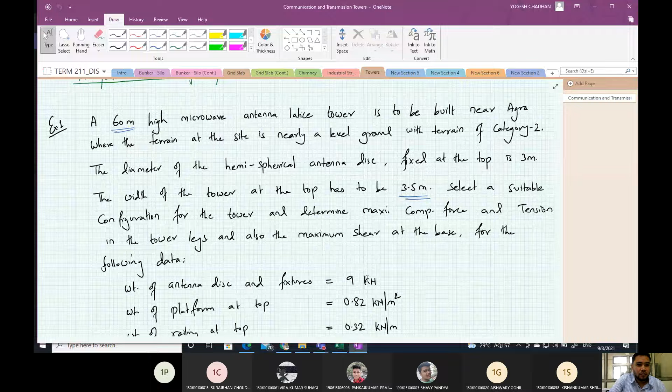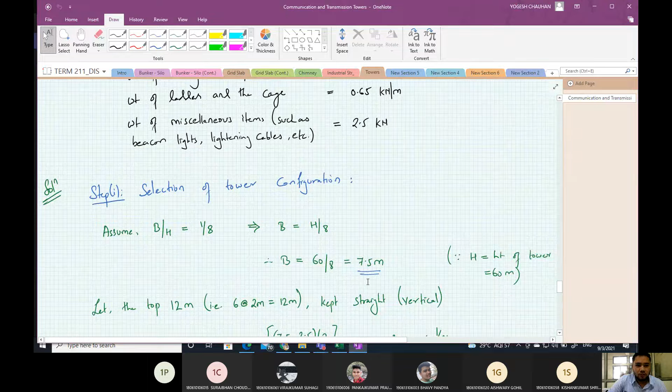Okay, so in the previous class, we started with an example of a microwave antenna tower. We were supposed to analyze and design a 60-meter high microwave antenna lattice tower. The first step was the selection of tower configuration, and we have reached the tower configuration shown here.

Now, today we'll find the loads acting on this tower. So the next step would be load calculations.

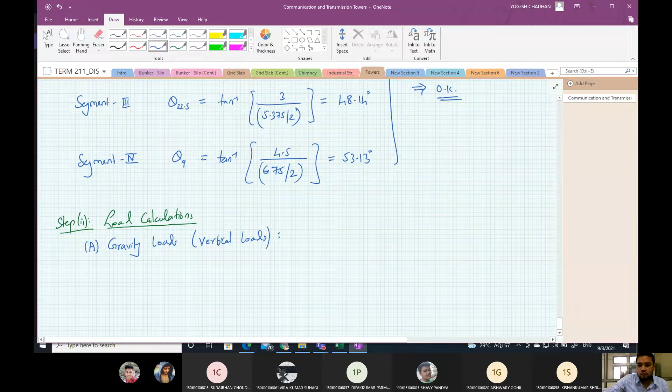First we'll find the gravity loads, that means vertical loads. In the theory class we have seen the gravity loads are due to the self weight of the member, the weight of the platform, railing, ladder, lifts, etc. provided, then weight of the antenna, instruments, appliances, etc., the weight of the gusset and secondary bracings, and the live load.

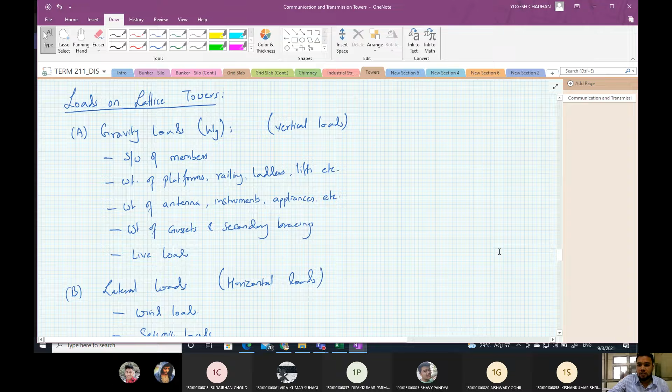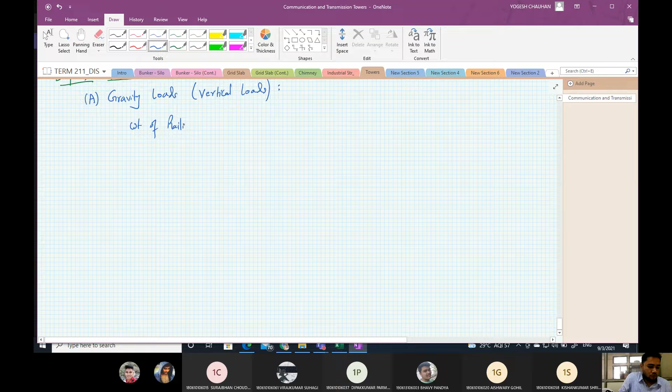So first is weight of railing, which is given in the data. The weight of the railing at the top is 0.3, not 0.32, it is 0.3.

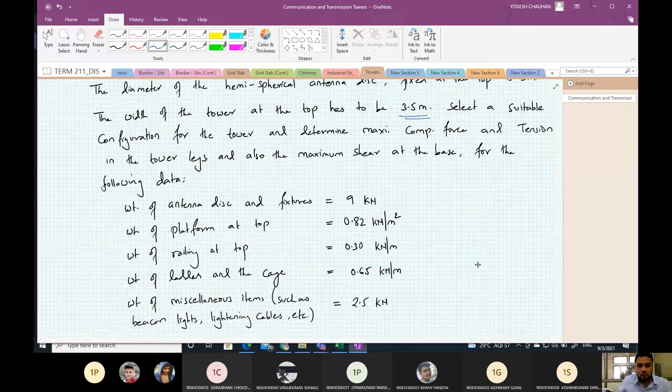Now it is in kilonewton per meter length. So multiply by 3.5 into 4. See, the railing is provided at the top, so at the top we have a 3.5 by 3.5 periphery, so it will be 4 times 3.5. So it is 0.3 into 3.5 by 4.

See, it is like this: 3.5 by 3.5, and the railing is provided, this is the railing. So this will be equal to 4.2 kilonewton.

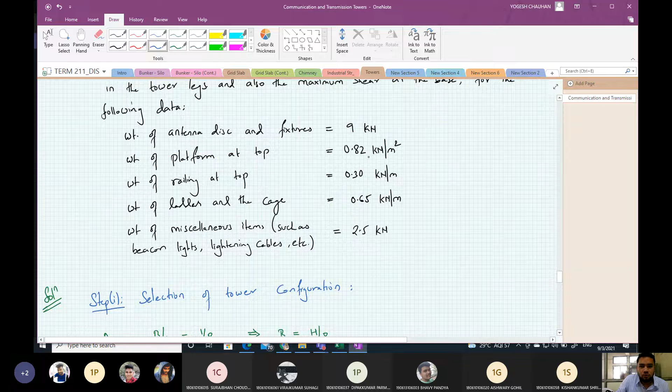At 0.82 kilonewton per square meter, which is given in the data, that will be equal to 0.82 multiplied by 3.5 by 3.5. This is the platform area. So the weight of the platform per square meter has been given to us, so multiplied with the floor area.

That will be equal to 10.05 kilonewton. Okay, here you can add the weight of the railing is at 0.3 kilonewton per meter.

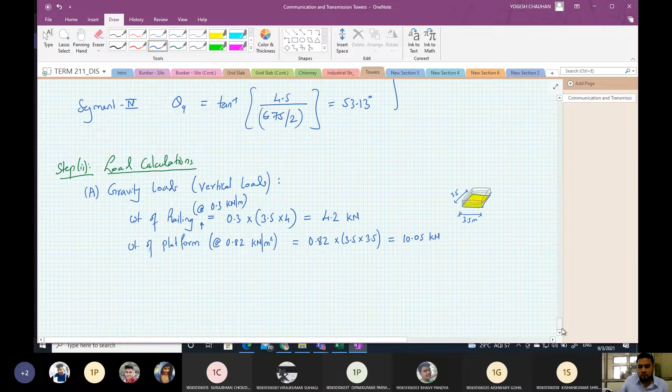Then the live load on the platform, which is 0.75 kilonewton per square meter. That you can obtain from IS 875 Part 2. For flat roof, it is 0.75. So that will be equal to 0.75 into 3.5 by 3.5, which gives you 9.19 kilonewton.

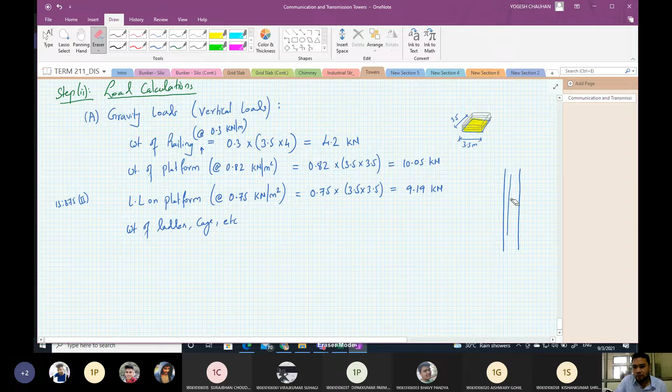Then we have weight of ladder, cage, etc. Now to climb the tower, ladder is provided, and the cage for the ladder is also provided. We have a ladder here, and there is a cage.

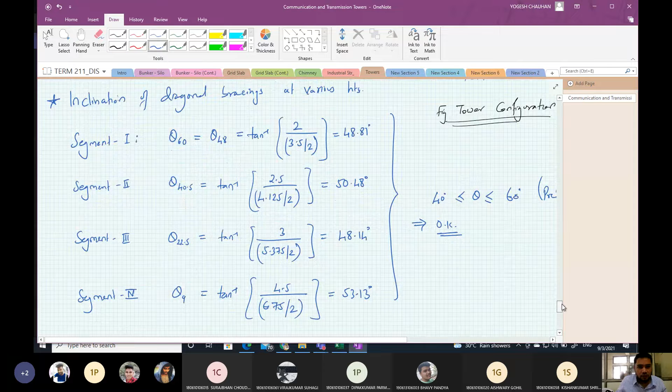So the weight of the ladder and cage, again given in the data, is 0.65 kilonewton per meter height. So 0.65 into total height, which is 60 meter, gives you 39 kilonewton.

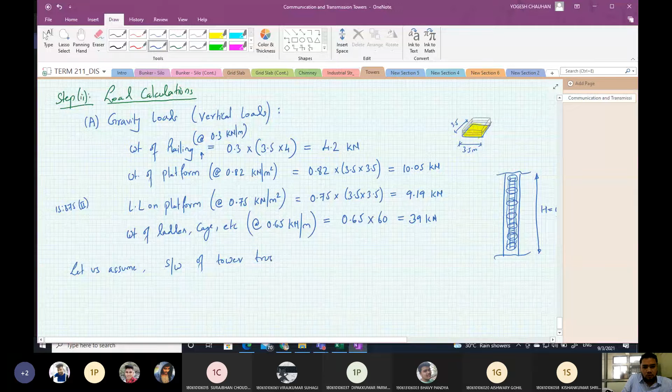Then let us assume self weight of tower truss, that is at the rate of 4.5 kilonewton per meter. This is also per meter height. So it will be 4.5 into 60, that will be equal to 270 kilonewton.

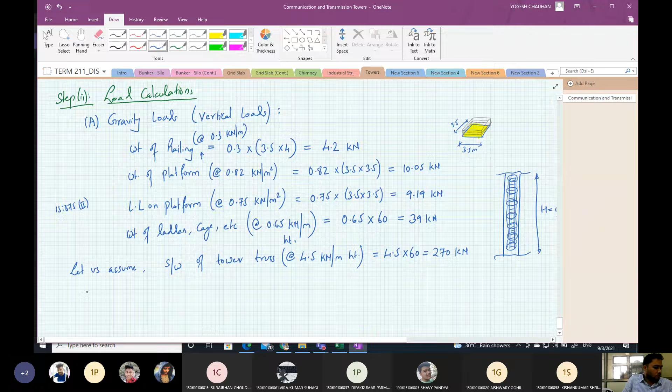Then we also have the weight of miscellaneous items, which is given in the data as 2.5 kilonewton, and the miscellaneous items include beacon, lights, lightning cables, etc.

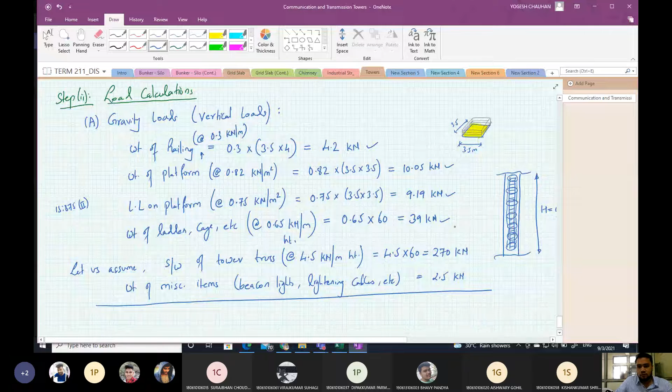So the total vertical load will be the sum of all this: 4.2 plus 10.05 plus 9.19, and so on, that will be 334.94 kilonewton.

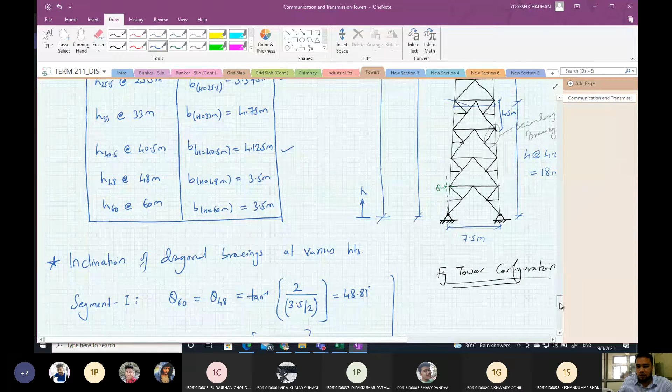So total weight on 4 legs will be 334.94. Now the weight on each leg will be equal to 334.94 divided by 4, which gives 83.735 kilonewton.

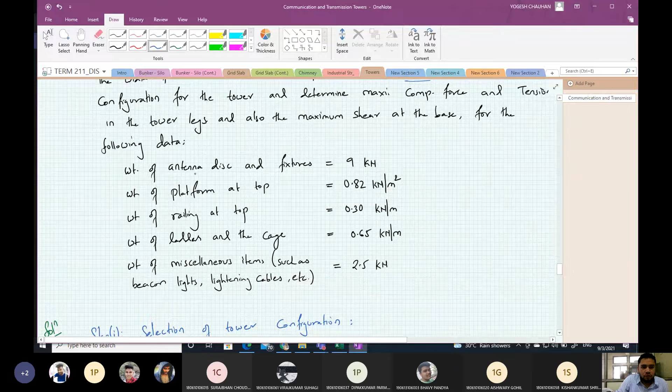Now in addition to this, we have the weight of the antenna disc and fixtures. This antenna and its fixtures will be connected on one side of the tower, so let us say it is connected here.

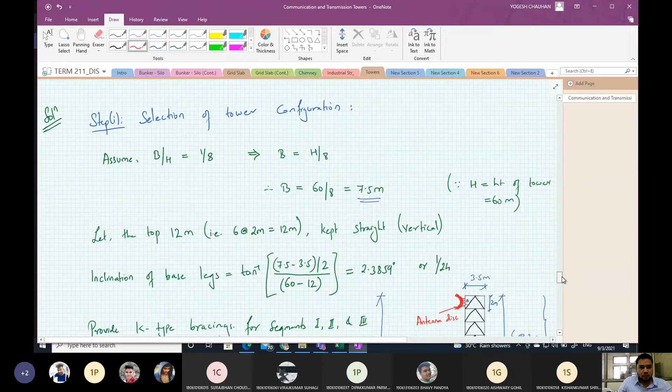This is the antenna disk, and its fixtures. The weight of this antenna and its fixtures is given in the data as 9 kilonewton, and this will be carried by the two legs, because the antenna is fixed here.

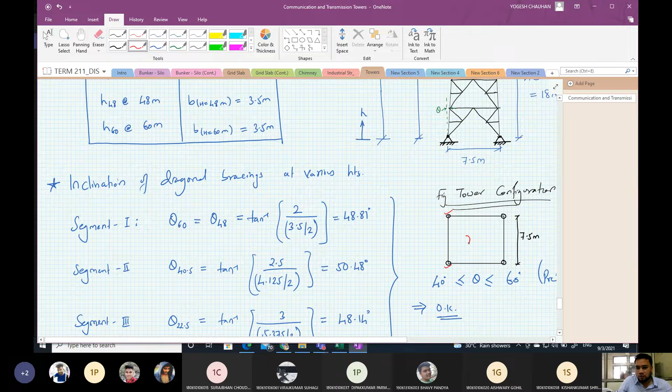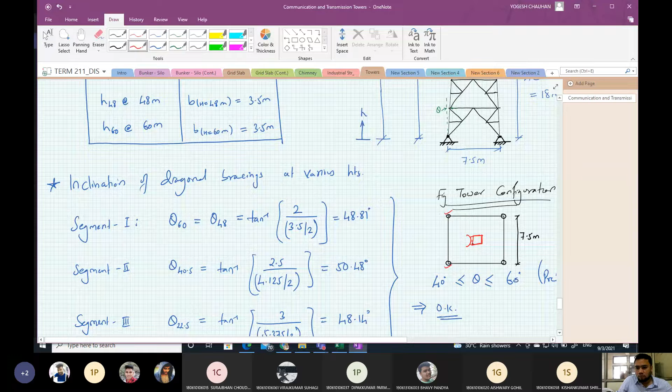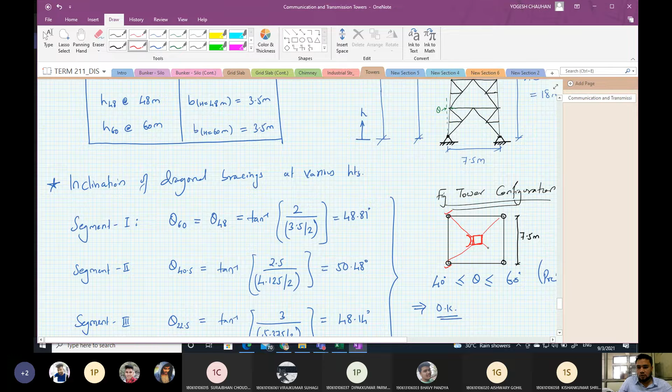So the weight of this will be taken by these two legs. Weight of antenna taken by two legs only. So it will be equal to 9 by 2, that is 4.5 kilonewton.

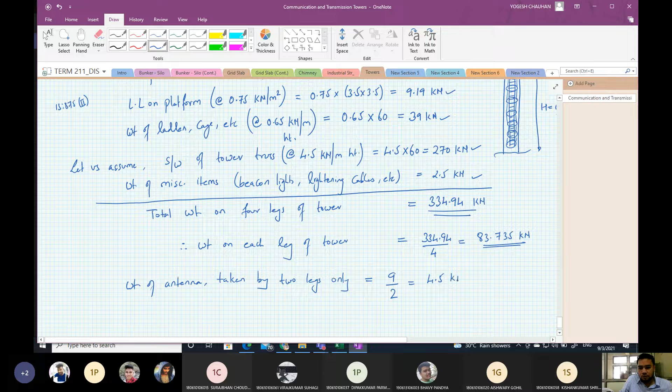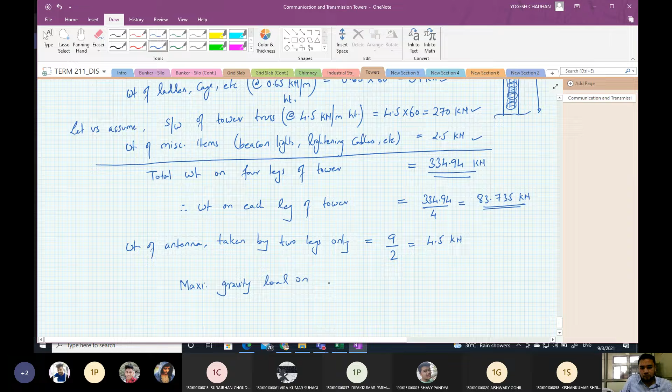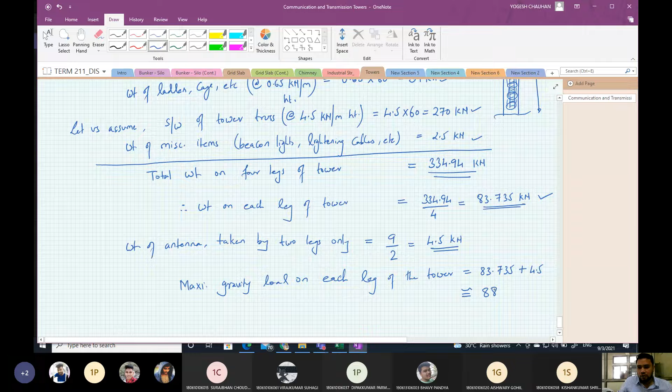So the gravity load, we can say the maximum gravity load on each leg of the tower will be equal to 83.735, that is this value plus this value, plus 4.5, that will be equal to approximately around 88 kilonewton. So we have the total gravity load.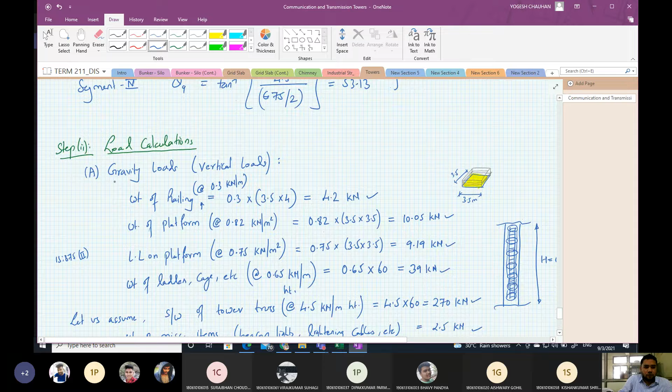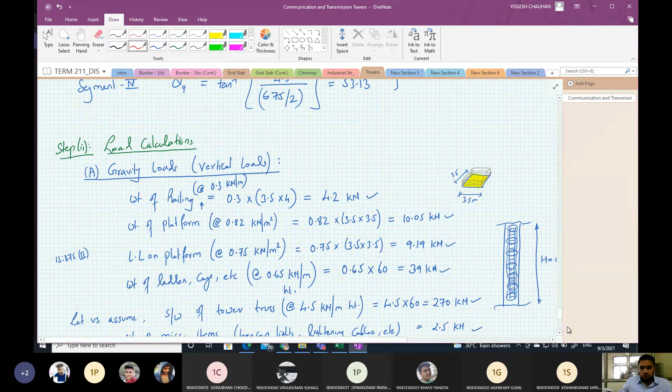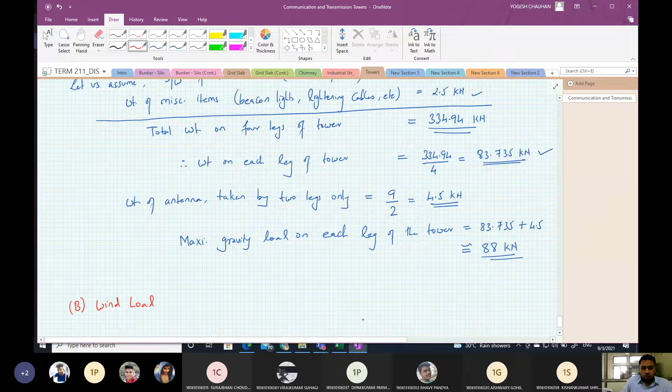Next we'll find the wind load. Here we'll be using IS 875 part 3, and we'll solve this example using the old code, and after that I will also show you what changes are there in the new code. So let us first find the wind load using the old code, and then later on show the changes for the new code.

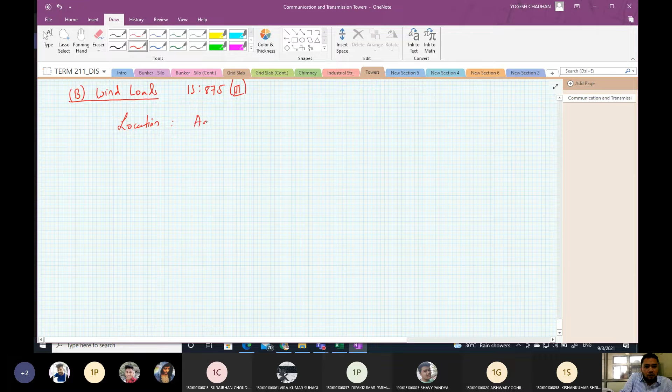So here our location is Agra. For Agra, the basic wind speed is 47 meter per second. Then we have been given the terrain as plain terrain with level ground and terrain category 2. So terrain data is given to us as level ground with terrain of category 2.

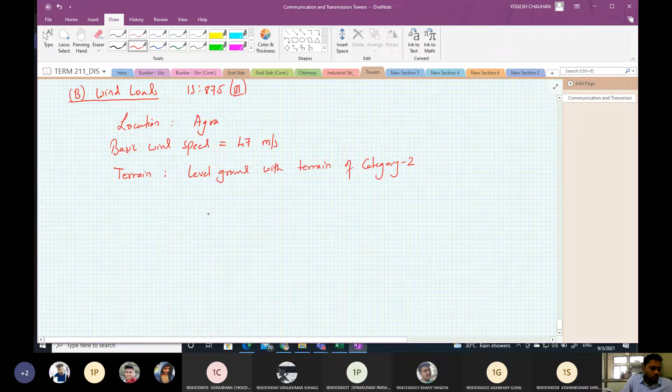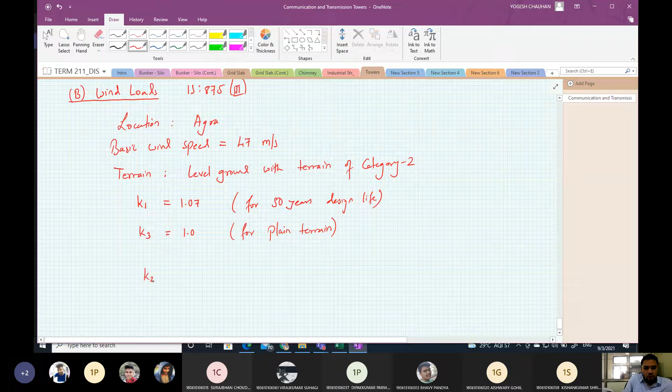Now K1 factor will be 1.07 for, let us say, 50 years of design life, and K3 factor is 1 for plain terrain. Now K2 will vary with height, so let us make a table of K2 for different heights, H and the value of K2.

We'll find the wind load at 18-meter height above the ground, 33-meter above the ground, 48-meter above the ground, and 60-meter above the ground. And the corresponding values of K2 are 0.99, 1.05, 1.09, and 1.11.

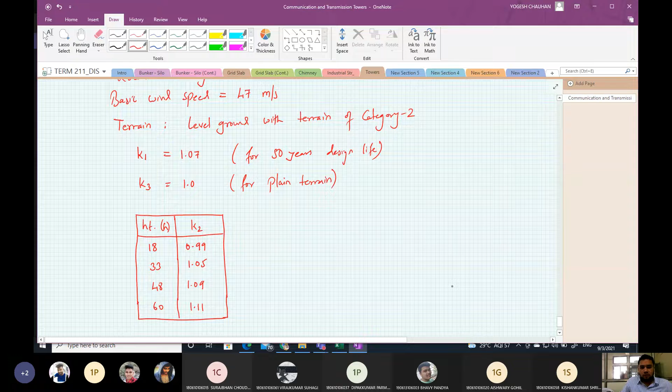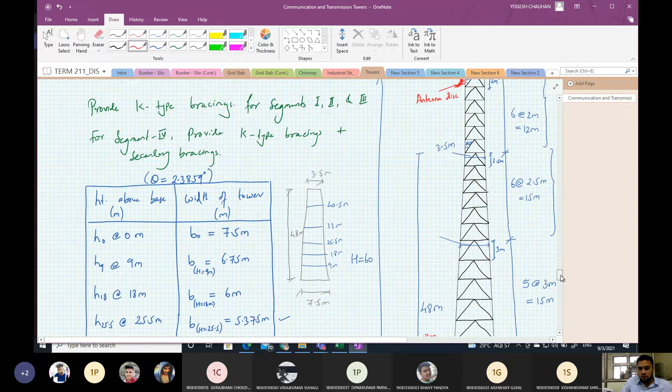So we'll find the wind load at these points. At this level is 18 meter. We'll find this at this level, that is 18 plus 15, that is 33 meter. We'll find at this level also, it will be 48, and at 60 meter.

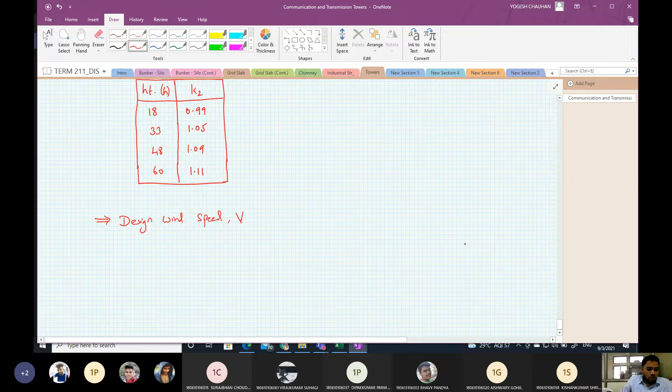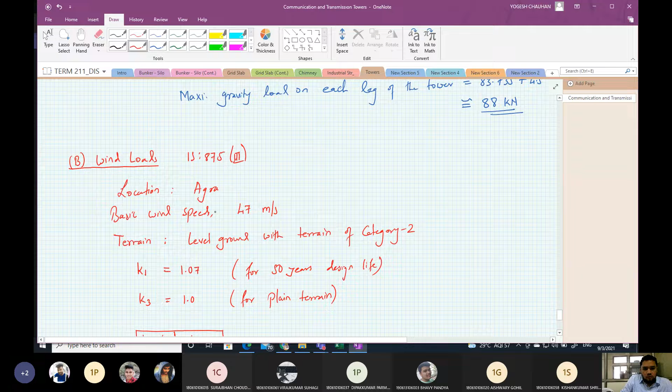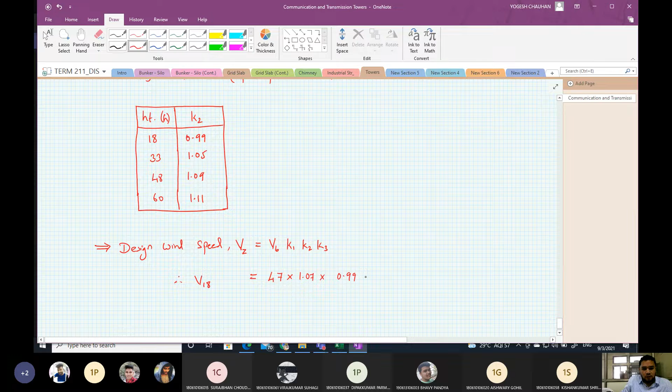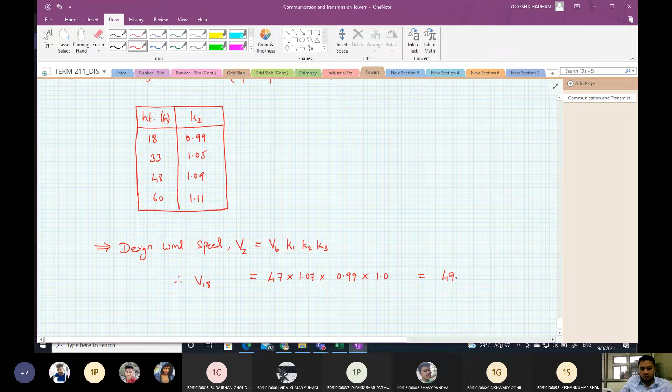So now let us find the design wind speed, Vz. We write this as Vz is equals to VB, K1, K2, K3. In the new code there will be a K4 factor also that we'll see later. So V18 means at Z is equal to 18 meter. At 18 meter height, VB is 47 into K1 is 1.07, K2 is 0.99 and K3 is 1. That gives V18 as 49.79 meter per second.

Similarly V33, V48 and V60. That will be equal to 47 into 1.07 into, K2 is 1.05 at 33 meter height, into 1.0, this will give you 52.80 meter per second. Or simply you can make a table here also for Vz, and write 49.79, 52.80, 54.82 and 55.82. So we can find it from K1, K2, K3, VB.

1.09 into 1.0, 1.07 into 1.09 into 1.0, gives 54.82 meter per second. 47 into 1.07 into 1.11 into 1.0, gives 55.82 meter per second.

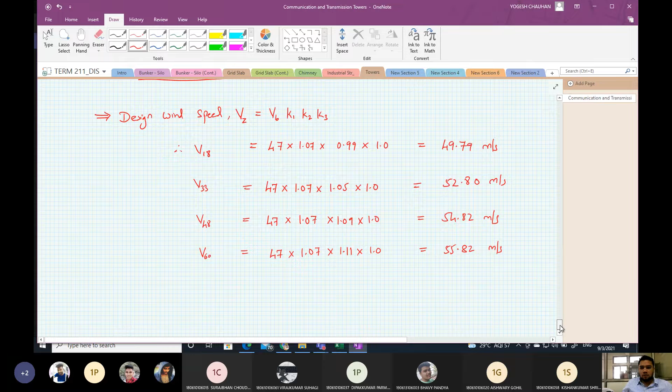So we have the design wind speed. Then we can find the wind pressure also. PD is equals to 0.6 Vz square. Design wind pressure PD or Pz, you can write Pz also. Pz is equals to 0.6 Vz square.

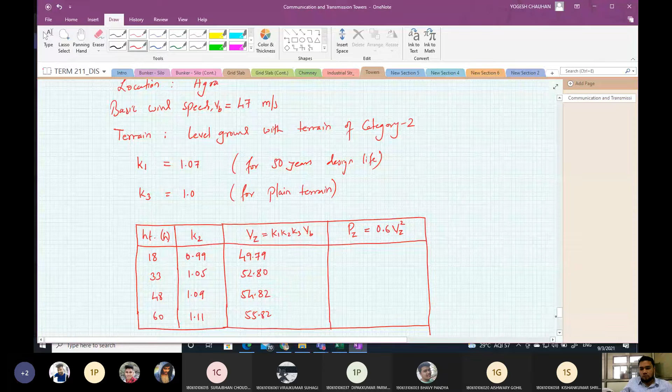So P18 will be equal to 0.6 into 49.79 square. Let us convert this into kilonewton per meter square, so multiply it with 10 to the power minus 3. That will give you 1.487 kilonewton per square meter. Then P33, P48 and P60 you can find in the same way.

P33 is 0.6 into 52.80 square into 10 to the power minus 3, that will be 1.673 kilonewton per square meter. You can make a table instead of calculating all this. ...square into 10 to the power minus 3, that will be 1.803.

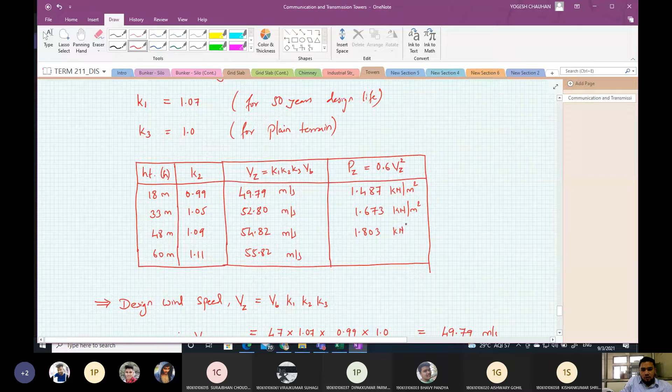You can also make an Excel sheet, because for transmission towers we are grouping the members and then designing, so you can make a spreadsheet which will be handy for such calculations. So the values are 1.487 kilonewton per meter square, and the wind speeds in meter per second at the respective heights in meters. Then 1.673 kilonewton per square meter, 1.803 kilonewton per square meter, and 1.870 kilonewton per square meter.

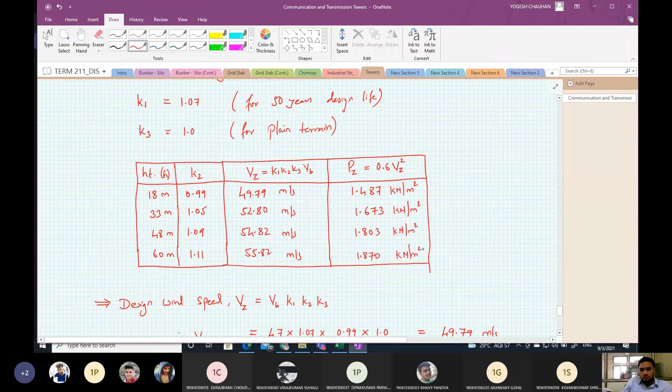So next we find the effective frontal area. Here in this case it will be the average frontal area.

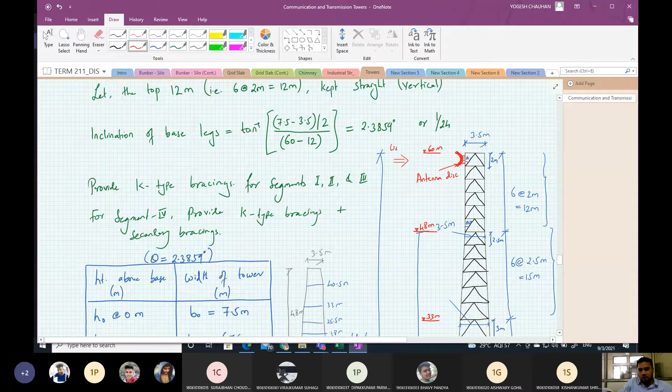We'll be using the gross area for various segments. For the first segment, the frontal area will be equal to height multiplied by the width of the tower, because wind will be acting from this direction. So it will be this height for the first segment - this is our first segment. The height of first segment is 12 meter by 3.5.

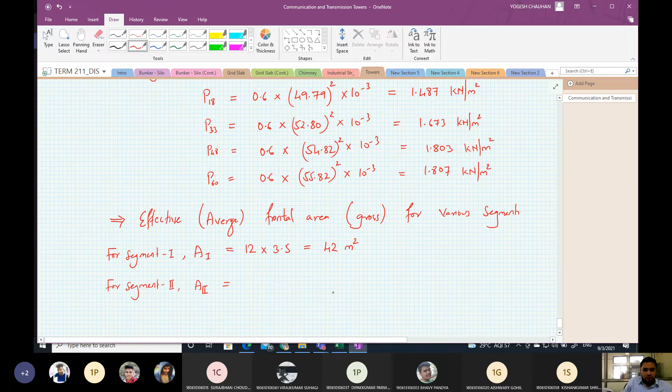So that will be 42 meter square. Then for segment 2, the effective frontal area will be equal to - now this time we have to take the average, because now the tower legs are inclined, so the width here is 3.5 and the width here is 4.75. At 33 meter height width is 4.75 and at 48 meter it is 3.5.

So you take the average width, and the height of segment 2 is 15 meter. For segment 2 the height is 15 meter, so it will be 15 multiplied by average width, that is 3.5 plus 4.75 by 2. So that will be equal to 61.875 meter square.

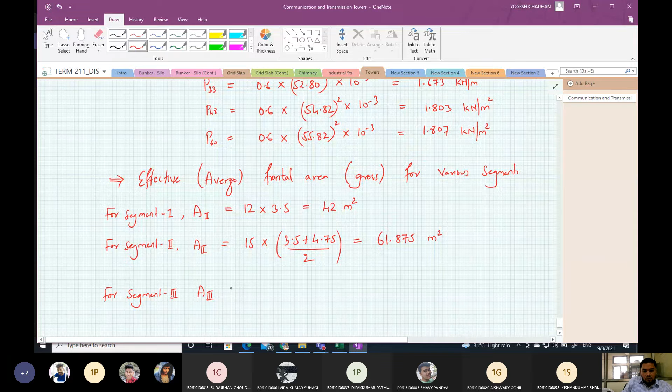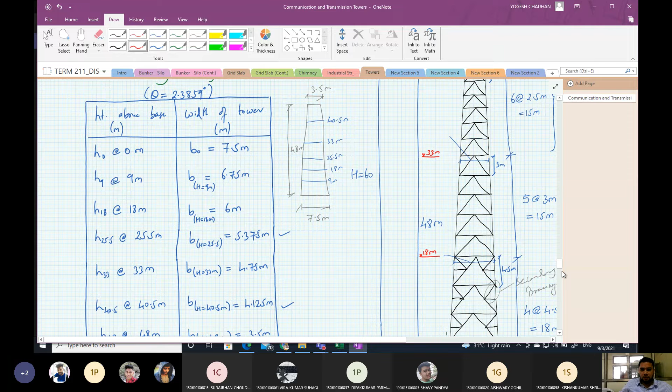Then for third segment, the area will be equal to - again the height of the third segment is 15 meter. This is segment 3, and the average height will be at 33 meter the width is 4.75, and at 18 meter the width is 6 meter. So it will be the average of 4.75 and 6. So 15 multiplied by 4.75 plus 6.0 by 2. So that will be equal to 80.625 meter square.

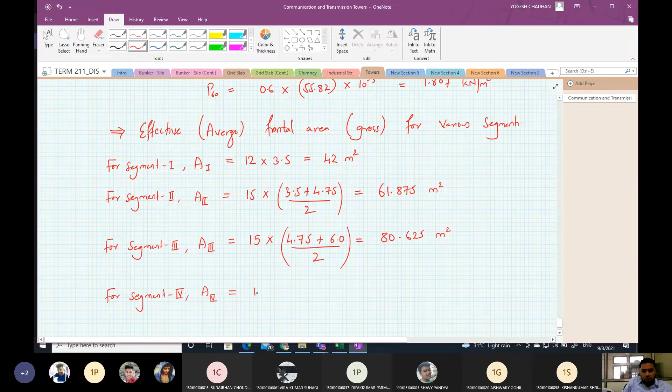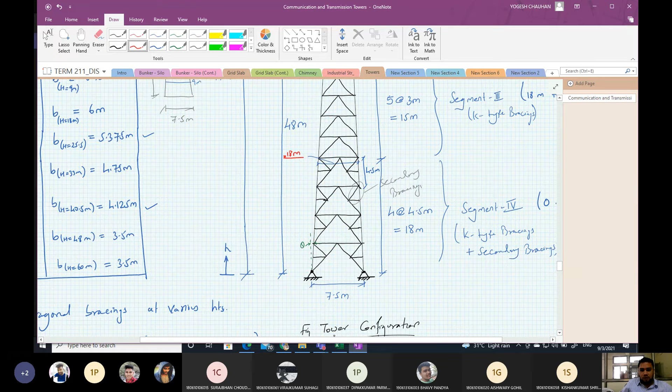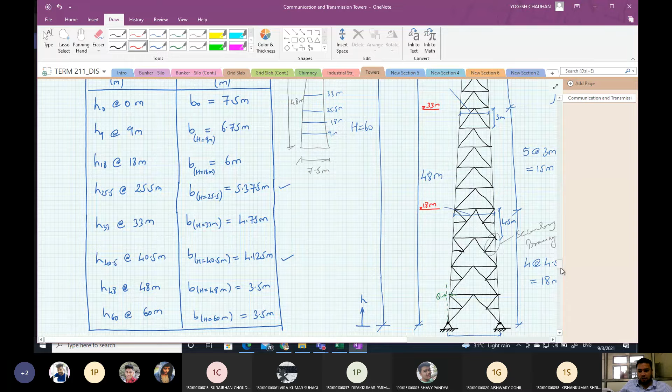Then for fourth segment, area will be, the height is 18. For segment 4, the height is 18 meter, and the width at the top is 6 meter, and at the base it is 7.5. So at base it is 7.5 meter, and at 18 meter height it is 6 meter. So average of 6 and 7.5, 6 plus 7.5 by 2, that will be equal to 121.50 square meter.

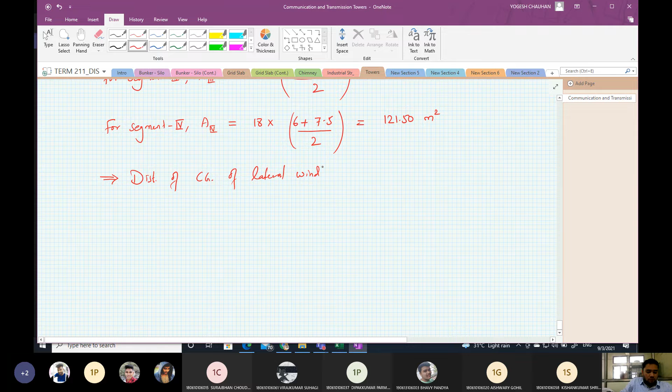Next is the CG of this wind force. So the distance of CG of lateral wind force frontal area, we call this as y bar, from the base, for various segments will be,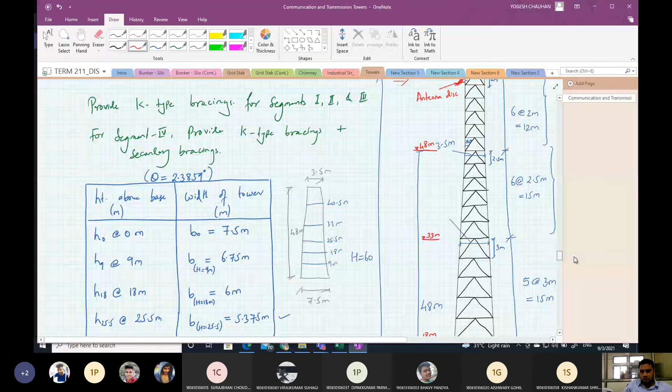so for first segment, y bar 1, that will be equal to - now CG of the first segment will be here. So this distance will be, see this is 48, and this is 12. So it will be 48 plus 12 by 2, that is 6. So it will be 54 meter.

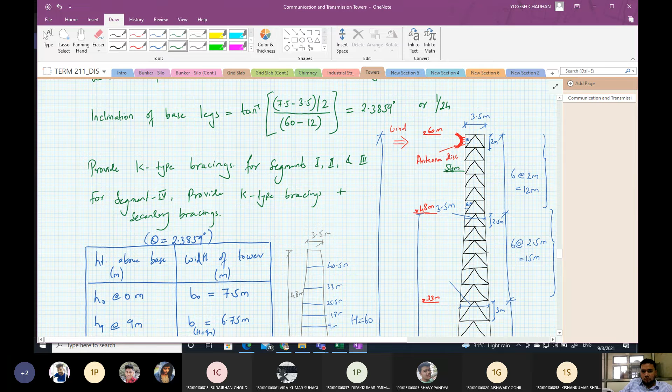This will be 48 plus 12 by 2, that will be 54 meter.

For second segment, the y bar distance will be equal to 33, that is this plus - now it is a trapezoid, so you have to use the formula for trapezoid, so that will be equal to 2 into 3.5 plus 4.75 divided by 3.5 plus 4.75 into 15 by 3, that will be 40.121 meter.

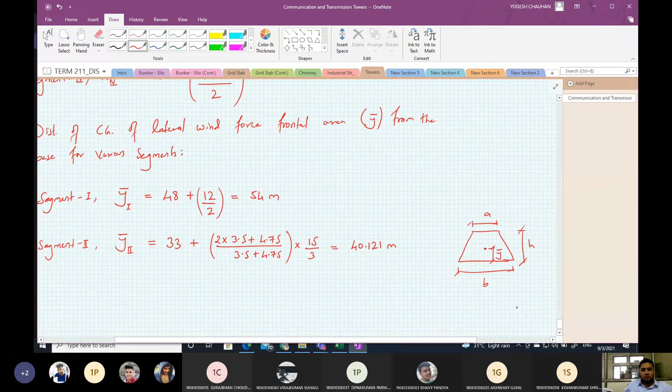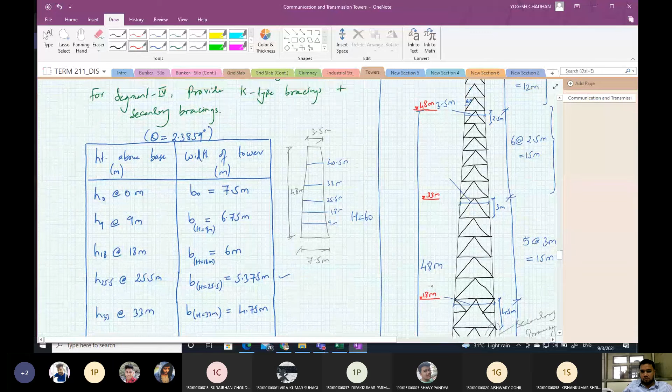Same way we can find the other heights also. So for third segment, y bar will be - now we are measuring it from the base, so the height below this is 18 meter. So 18 plus - now this time the width at the top will be 4.75, so 2 into 4.75 plus base width is 6 meter, so divided by 4.75 plus 6.0 multiplied by, again the height is 15 meter only, so that will be 25.209 meter.

Then for segment 4, y4 will be equal to 0 plus, it will be 2 into 6.0 plus 7.5 all divided by 6.0 plus 7.5 multiplied by 18 meter, which is the height of segment 4, so that will be equal to 8.667.

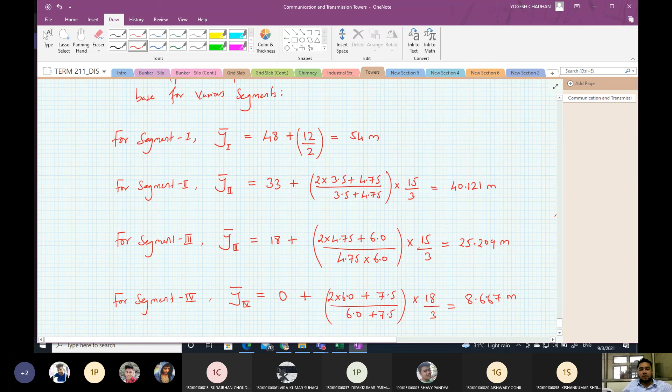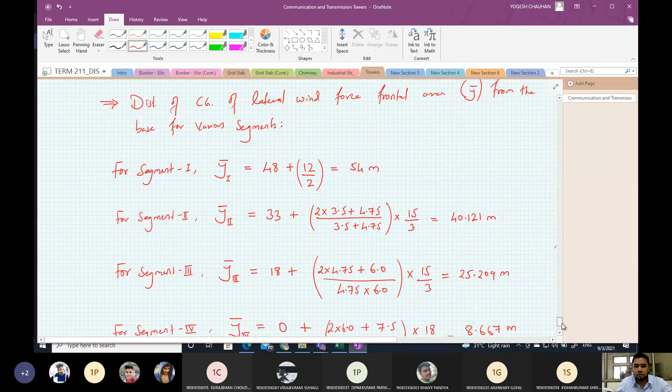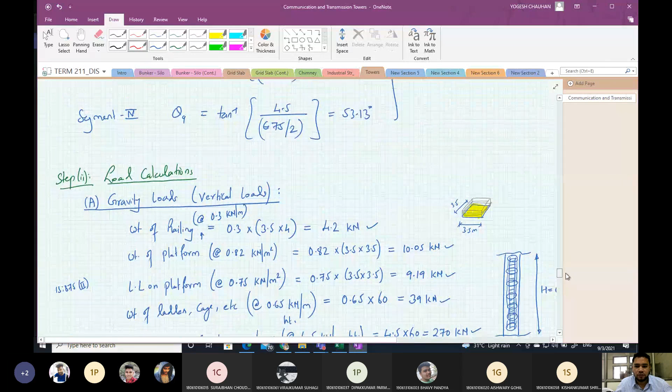Let us stop here, and in the next class we'll continue this calculation for the wind load. We'll find the solidity ratios, and then we'll find the total wind load on the tower. So today we have seen how to find the gravity loads on the towers, and we have seen some portion of the wind load calculation, which will continue in the next class.